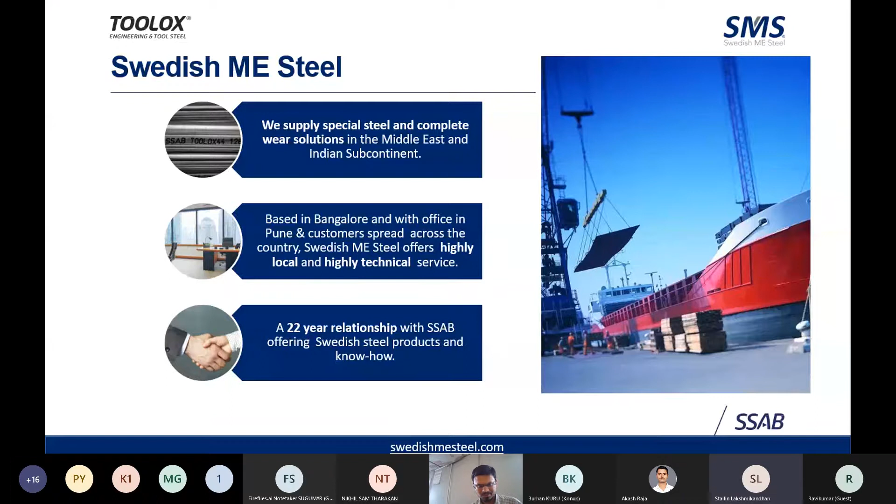So what is Toolox? Toolox is a multi-purpose, ready-to-use engineering steel. You might have heard about a lot of pre-hardened materials, but this takes the cake in its manufacturing capabilities, how it uses modern manufacturing technologies, and the combination of both the chemical and mechanical properties which the metal can achieve. It is produced based on a high strength and low alloy concept.

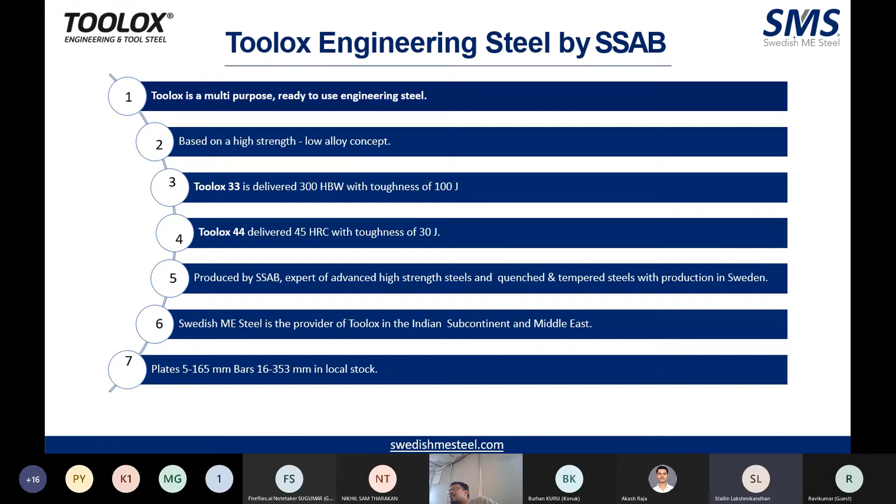It comes in 2 different forms, Toolox 33 and 44, with 30 HRC and 45 HRC respectively. And it is produced by SSAB, who are known for producing advanced high strength steels and quenched and tempered steels, with the production happening in Sweden. So this is the mill in which Toolox is produced, in a place called Oxelösund in Sweden. The mill is capable of producing more than 8 million tons of special steels annually.

So you might have seen a test certificate with other tool steel manufacturers. What differentiates us from others is you not only have the hardness value and the chemical composition, you have the plate material ID, so that if something goes wrong, you can trace it back to where it's been processed. You have the hardness, the chemical composition, and it also comes with ultrasonic testing of each and every single plate, as well as the toughness, and the yield and tensile strength values.

So you have the chemical composition and all the mechanical properties given, and they are all guaranteed properties. That is what differentiates Toolox from other tool steels. We use a blast furnace in the steel making, not the arc furnace of older years, and the quality is maintained throughout the production techniques.

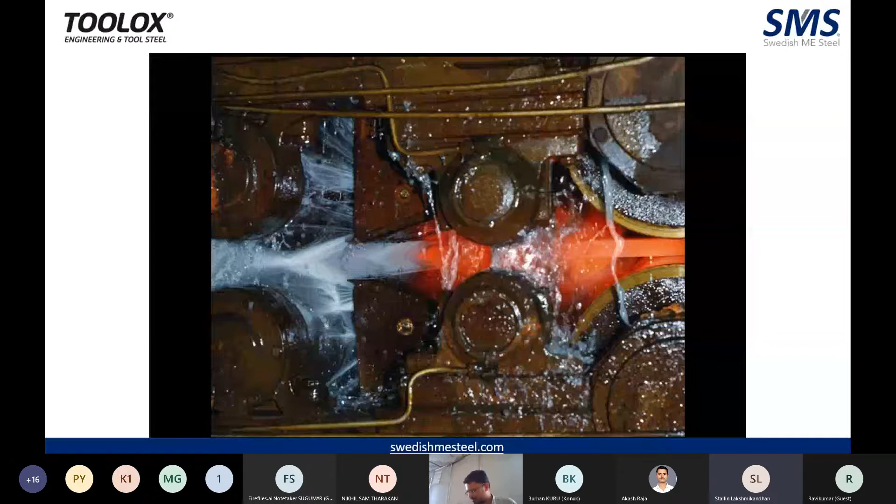So if you sum it up, this is exactly where the entire R&D of the material happens. As you can see, the metal is in hot rolled condition. It's water quenched, and it changes to room temperature within a matter of seconds. Extreme water quenching happens at extreme force, and for the different thicknesses of the material being produced, the amount of water at different temperatures defines the matrix of the material. And that's where we get this combination of high hardness and high toughness.

Since we had already said that this has a unique combination of high hardness, high toughness, and high tensile strength, it can be a multi-purpose steel, and it can be used in your plastic molds, your cold forming, your hot applications, as well as various engineering components. So for us today, the main focus lies in cold forming.

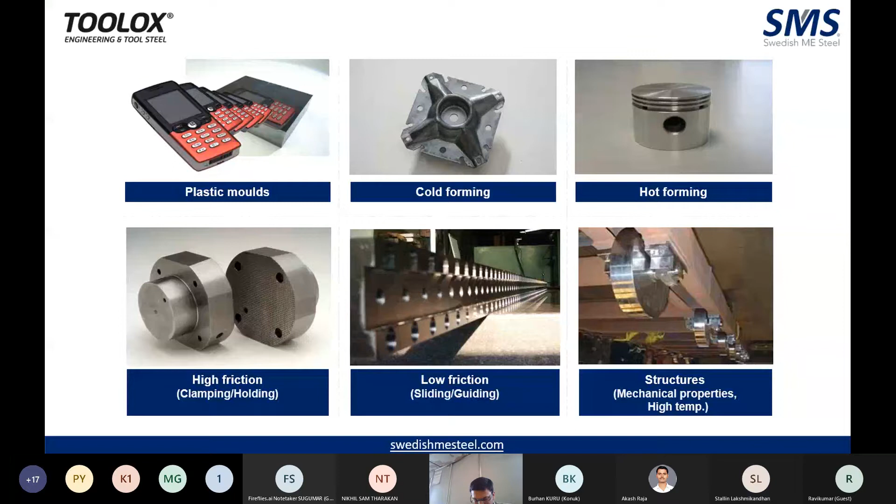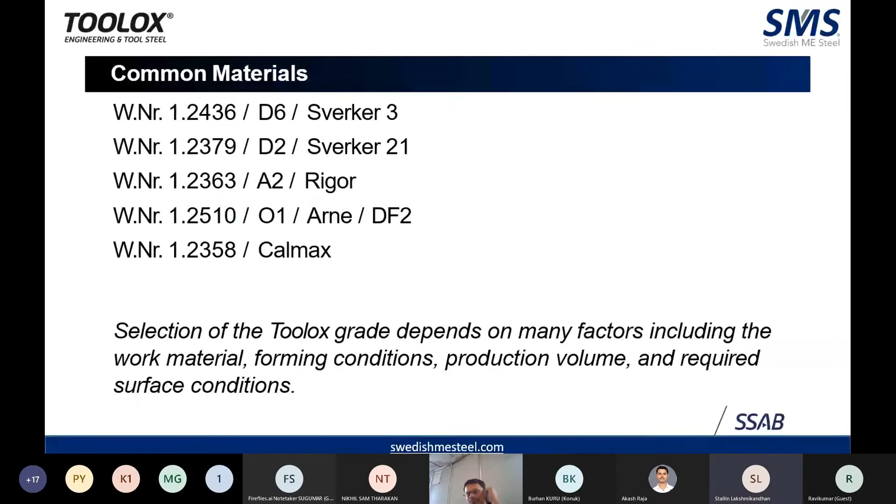So Toolox in cold forming. So these will be the common materials that you would have used: D2, D6, A2, O1, Calmax, or various kinds of material which are commonly used. And if you choose the application wisely, then all these materials can be replaced with Toolox.

So selection of Toolox grades depends upon many factors, including the work metal, what is the forming condition, what kind of volumes you expect out of the material, and the surface conditions that you require. So based on that, you can decide whether to go with Toolox at 45 HRC itself, or you need to do any kind of surface treatment to it.

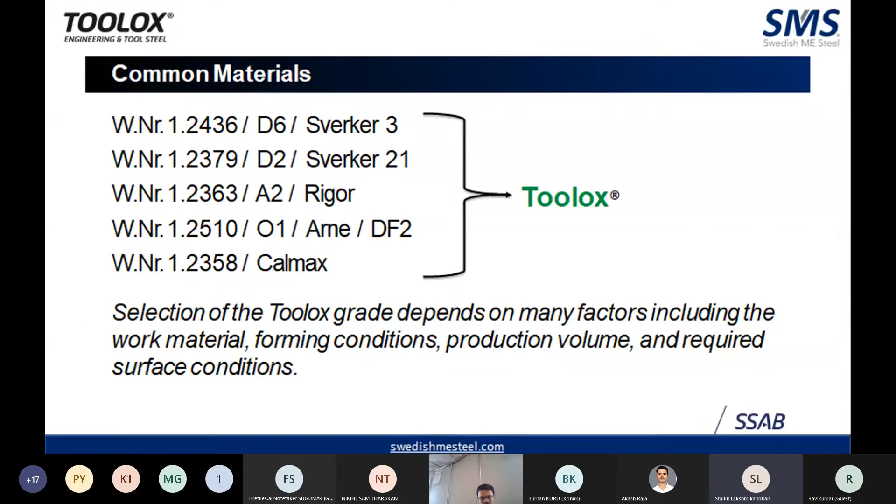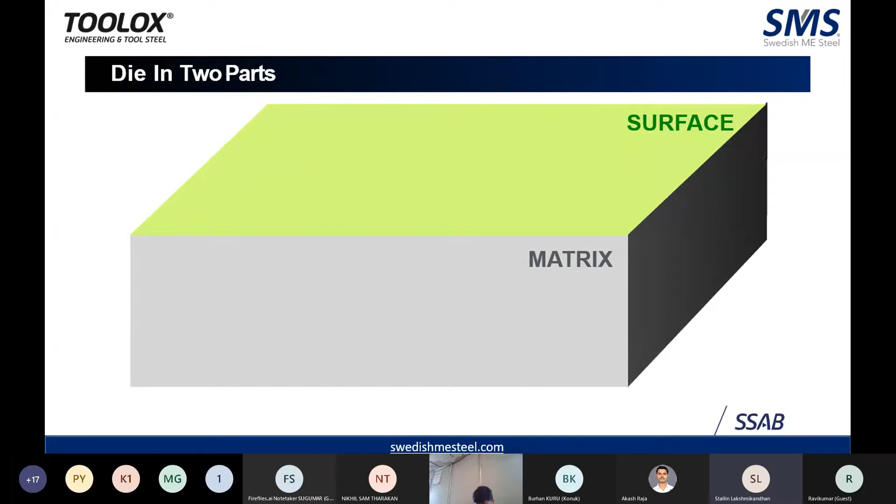So for a die in two parts, let's look at the different points required for a material both at the surface and the matrix level. At the surface level, the material has to resist different types of wear. It has to provide high surface quality and finish, and it should be suitable for surface engineering. At the matrix level, it should resist chipping and cracking. It should carry forces of various service loads, and it should maintain dimensional and shape stability.

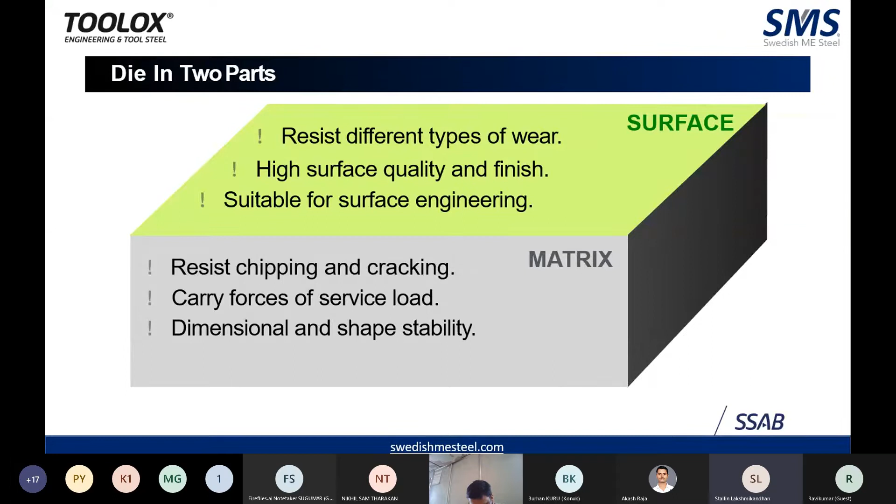So if you consider all these qualities both at the surface and matrix level, Toolox with its unique properties ticks all the right boxes and all the different parameters that you require out of a tool steel.

So when you look at cold forming, there are different failure mechanisms associated with it. One is abrasive wear, caused by hard work material scouring the tool surface. Adhesive wear happens due to friction and adhesion between the sliding surfaces. Chipping is one of the major problems. It is caused by micro cracks, which once initiated propagate through to the surface. And plastic deformation is also a major failure mechanism, and also cracking.

So all these failure mechanisms, particularly cracking, since Toolox comes with a high toughness value, that helps you address wherever you face problems with cracking. Then Toolox can be an effective and efficient material in replacing or addressing those failure mechanisms.

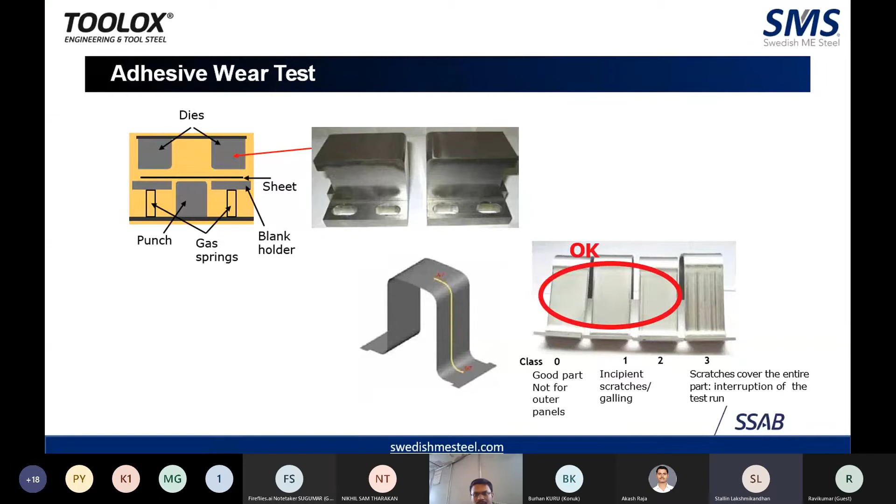So this is the adhesive wear test. So the component with the scratches would interrupt your production run. So 0 and 1 would give you successful results.

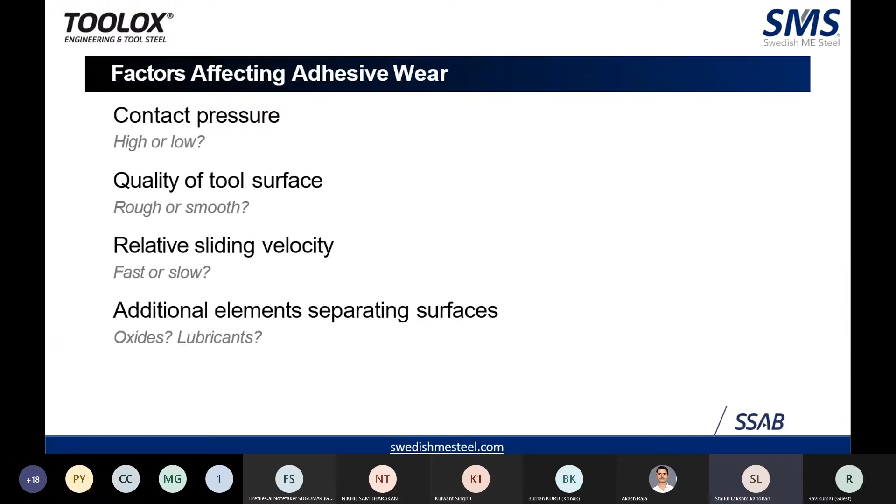So we have seen the failure mechanisms, and we'll just look at the factors which affect adhesive wear: contact pressure, quality of tool surface, sliding velocity, additional elements, separating surfaces. So depending upon how you're using it, for example, you can check whether the contact pressure is high or low, or the quality of the tool surface, whether it's rough or smooth, and then accordingly you can work on it.

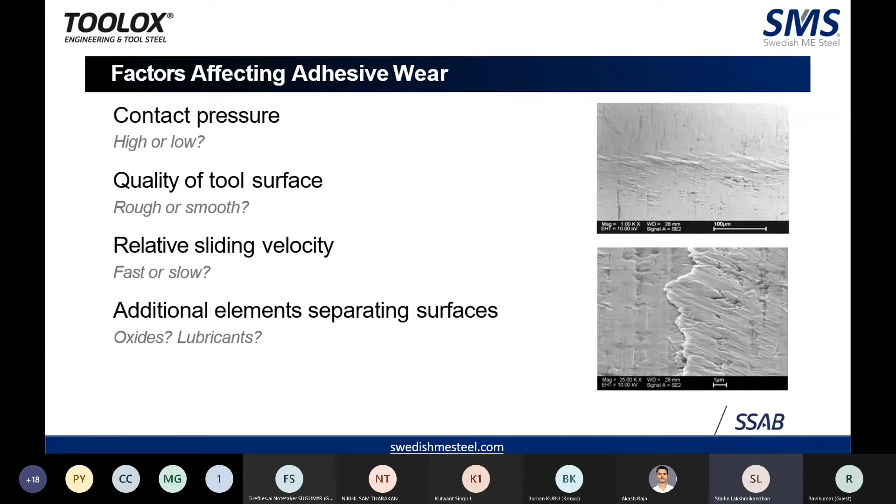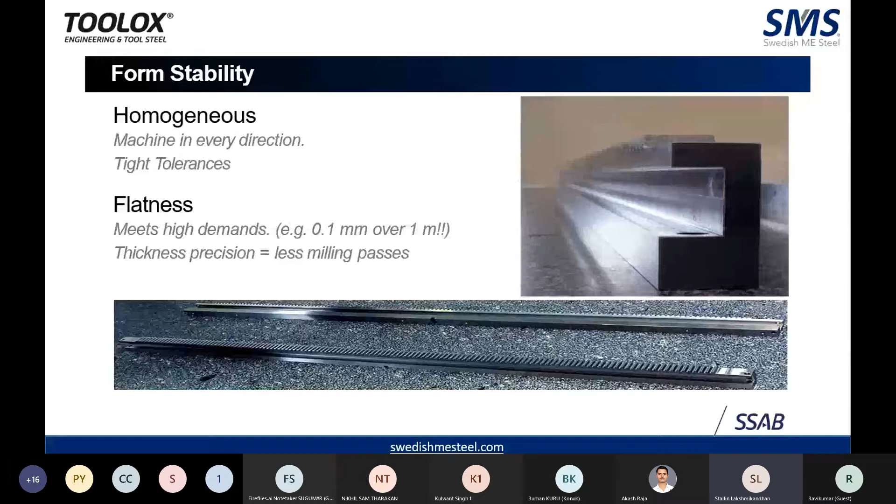But from our experience, the manufacturing time from raw material to the finished part, even without considering the heat treatment time and the cost involved, you'll be able to save at least 25 to 30% of the time, so you'll be able to manufacture Toolox faster compared to the regular materials.

So there will be a lot of questions. Okay, fine, you are saying your material is 45 HRC, but I require 50 HRC, 58 HRC, 60 plus HRC for my applications. What am I to do? Is this material compatible with that? It's very much compatible. Toolox is a very effective and excellent substrate for all kinds of surface engineering that you need to do.

So as you see, there are different kinds of surface treatment methods available. We'll see briefly the parameters required for different surface engineering methods. And this shows Toolox 44 at 45 HRC as the base material, and you'll be able to achieve around 65 HRC with nitriding, more than 70 HRC with PVD, and close to 55 to 56 with induction hardening.

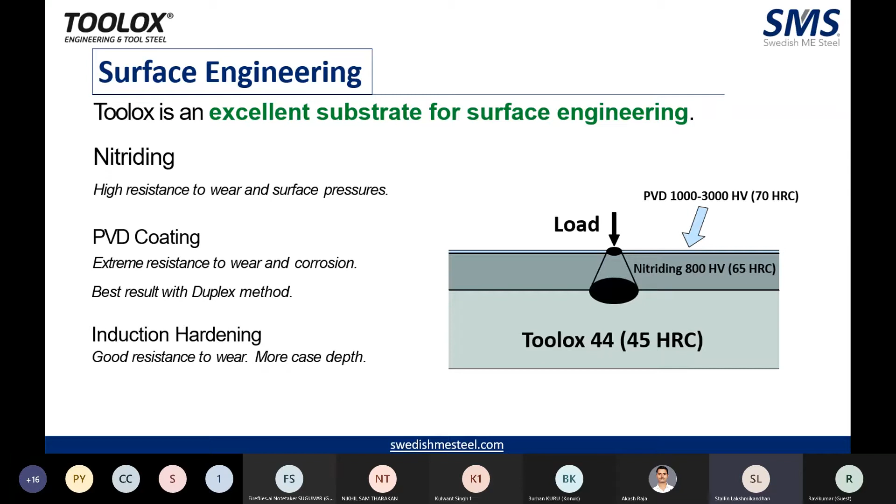So this chart gives you the various values for Toolox 44 and Toolox 33, at what hardness, what soaking time, and up to what hardening depth that you can take it into for this. So depending upon the hardness that you require to achieve, you can use the required process.

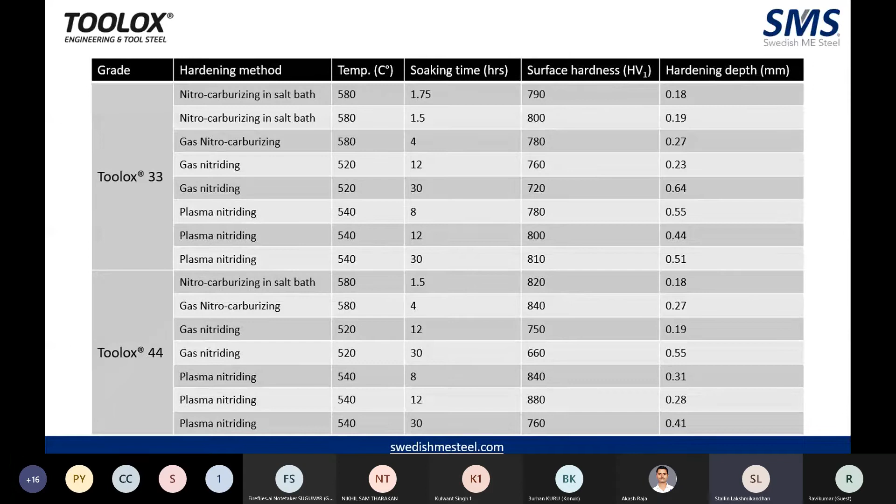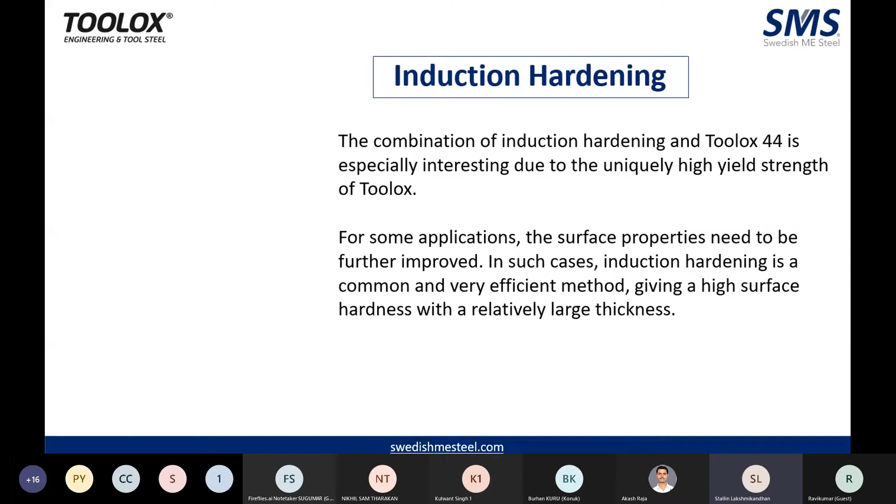So first we'll check out the induction hardening. This is a process in which the case depth can be improved up to 3 to 4 mm. The hardness achieved is around 55 to 57 HRC. The depth of hardness is 2 to 4 mm that you can achieve.

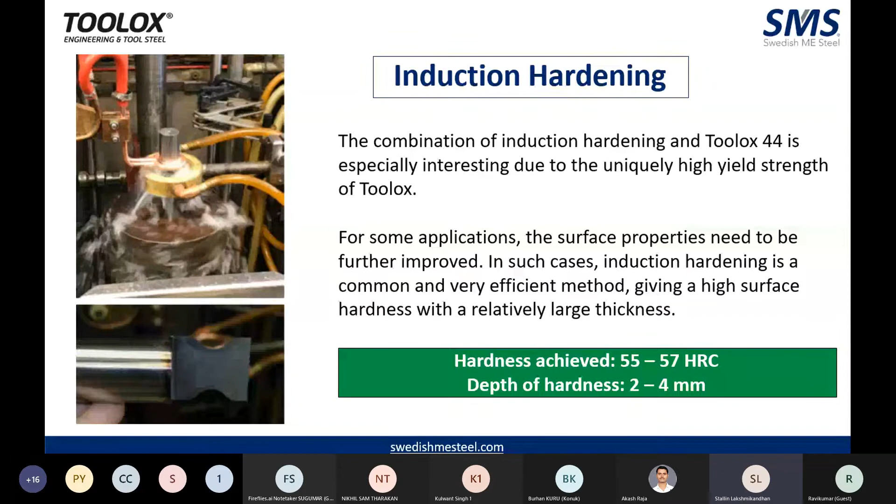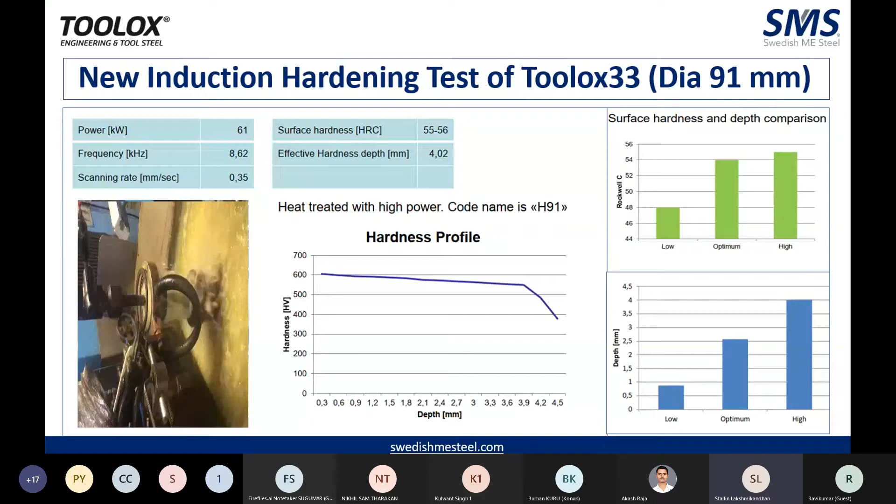So this is the new induction hardening test that we have done for Toolox 33 in 91 dia. You can just see the process, how it's been done. As you see for the different parameters of induction hardening, what you can achieve is, even with Toolox 33, you can achieve 55 to 56 HRC, with an effective hardness depth of 4.02.

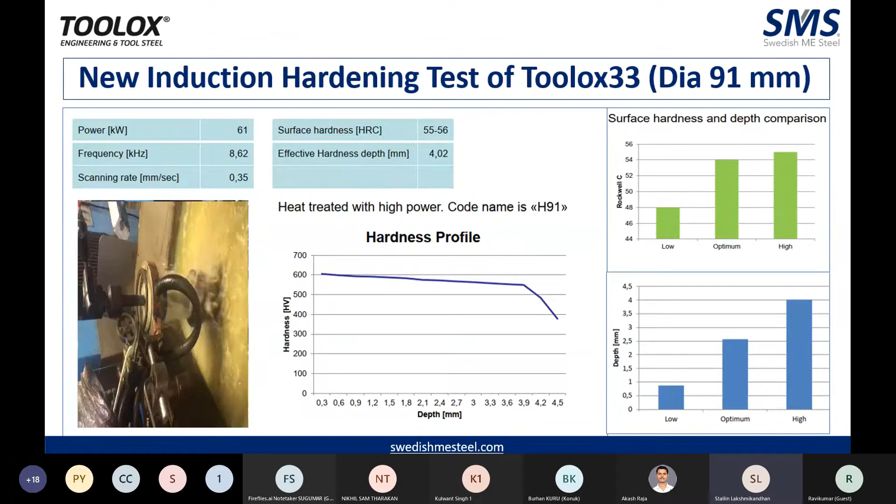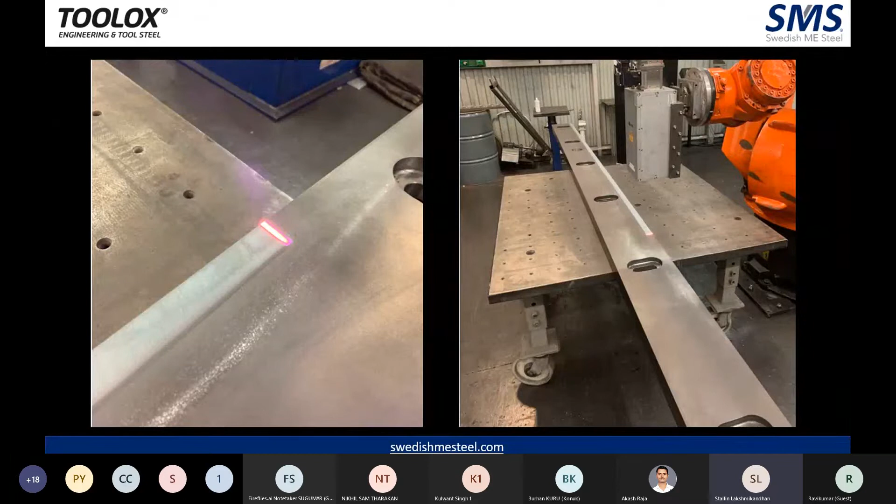So this is also another process, which is an upcoming, innovative and exciting process called laser hardening. This is also a technique wherein you will be able to increase your case depth of 0.2 to 2.

So when it comes to Toolox 44, you can improve up to 800 HV, and Toolox 33 you can go up to 700 HV. The main advantage of having laser hardened Toolox 44 is there is little distortion in the whole component.

And since the laser hardened beam width is very accurate and to the point, your cutting edges can be done with this laser hardened edge, and that will give long lasting results. So we shall see how it is useful in the application part when we go through it.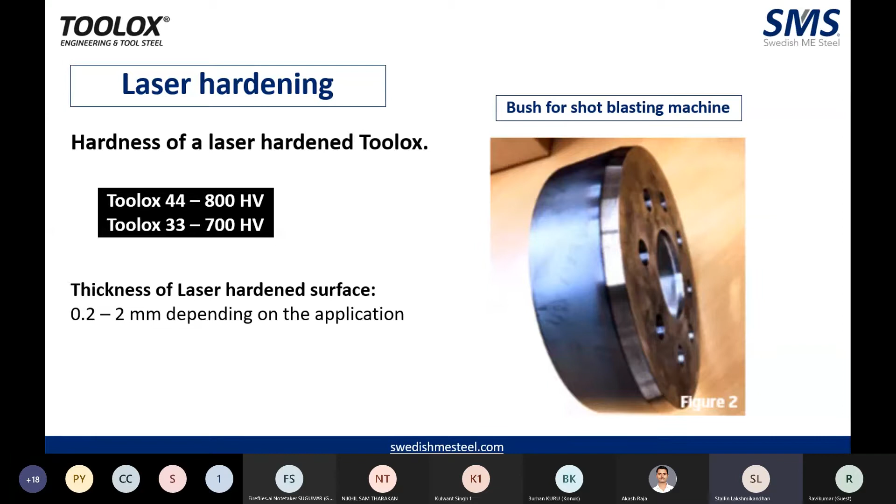So Toolox 44 is delivered at 45 HRC. That's been said. So now comes the question of, okay fine, it's a 45 HRC material - whether I need to spend a lot of money and time for machining and bring in new tools. So we are trying to release those kind of apprehensions. Yes, you require proper tooling, recommended toolings for this.

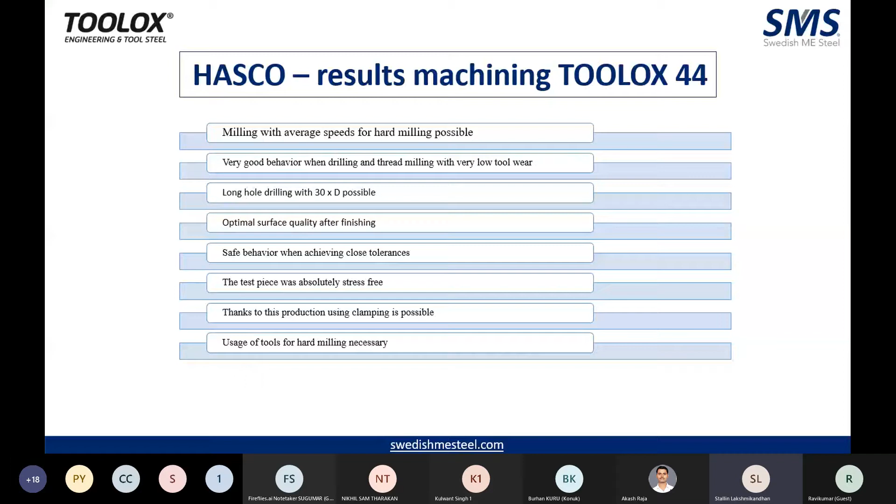There is a famous mold maker from Europe, HASCO. So they have done machining with Toolox 44, and this is their feedback. If used with proper tooling, machining Toolox is not a big task.

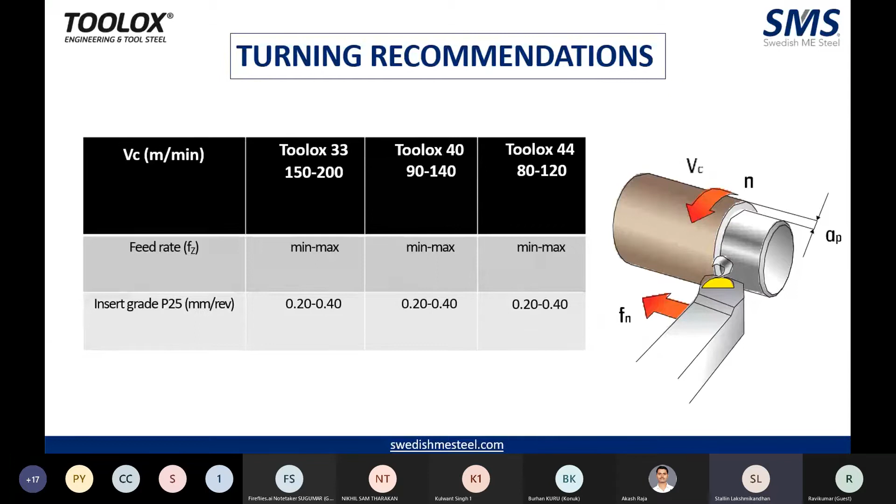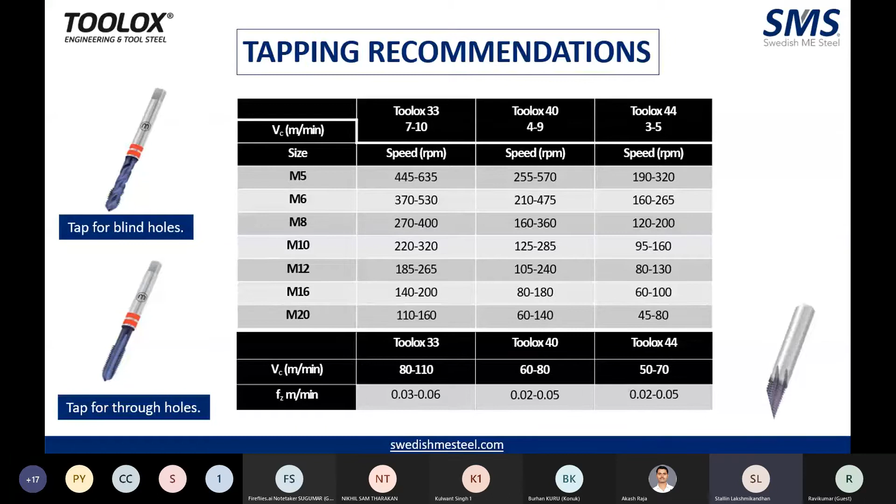This is the turning recommendation. And this will be our tapping recommendation. This is for drilling. So it is not necessarily that you need to take only what are the brands that we have recommended here. You can ask your tool supplier to give any tool equivalent to the nomenclature, whatever has been mentioned. So that will serve your purpose.

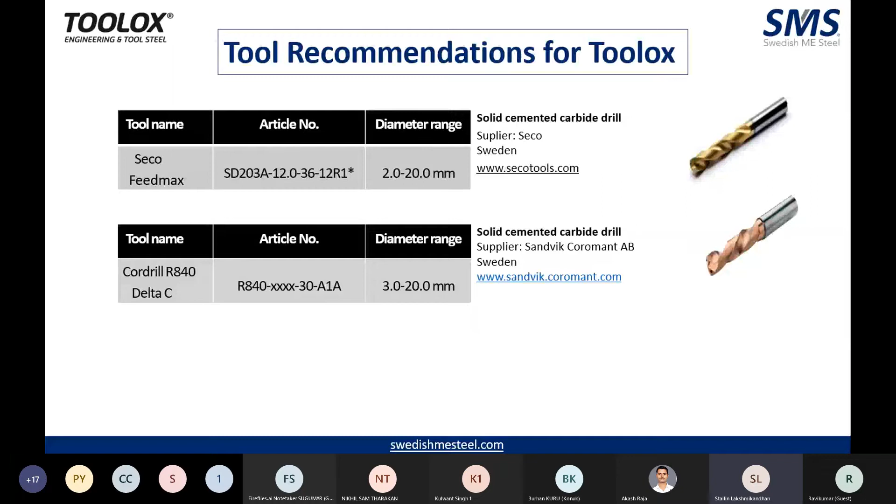So high-speed rough milling, which has been done. As per the example that we have given here, the insert lifetime has run around 180 minutes, and the volume of chip removed is 161 centimeters square per minute. So even though you have removed extensive, close to 30,000 centimeters square of chips, the deformation is very, very minimal. It is able to maintain less than 0.1 mm on flatness, even though you have done extensive machining with this.

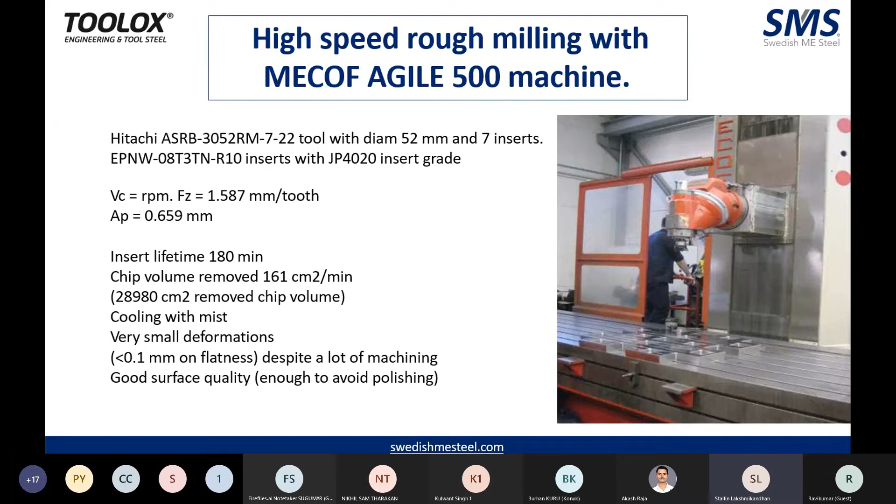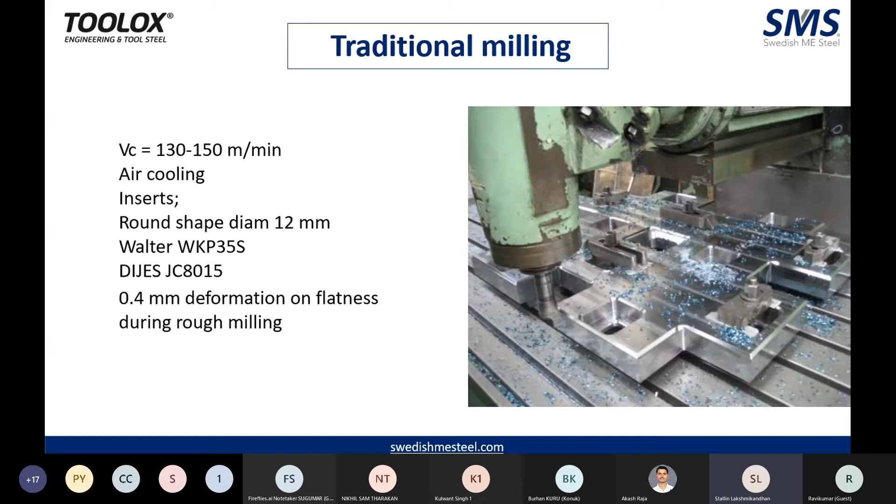So not only can you have extensive machining like the previous one, even traditional milling you can do with Toolox. So even with traditional milling, the deformation is around 0.4 mm on flatness during rough milling. This has been done in a normal tool room in Pune. As you can see, milling is not restricted to any particular machine.

So let's look at the different applications Toolox is used for. Before getting into the applications, we'd like to remind everyone of the quality of the material that we are in here. So this graph gives you a clear idea of how Toolox is comparable to other steels.

So Toolox is almost, if not much less, I mean much cleaner than an ESR remelted steel. It's all rolled material in the flats, and what you get is a clean steel without any inclusions.

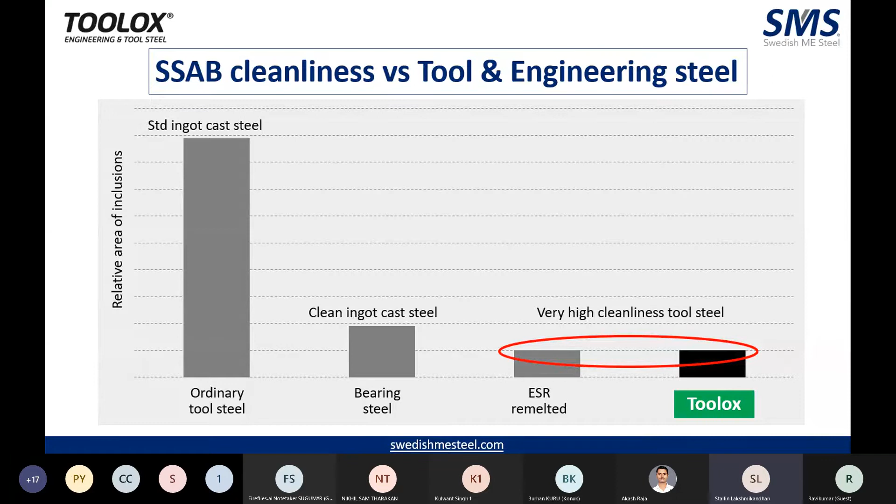So let's look at the comparison between Toolox 44 and D2. You can look at the things, and Toolox being delivered at 45 HRC, you get a guarantee of toughness at 18 joules. So whatever metal being manufactured here, it has been done, provided with guaranteed properties.

And at the end, you will find that the CE values being pronounced as 0.97, and 4.25 for D2, which denotes that the thermal cutting and welding of the material is very good for Toolox, and that's not so the case for D2.

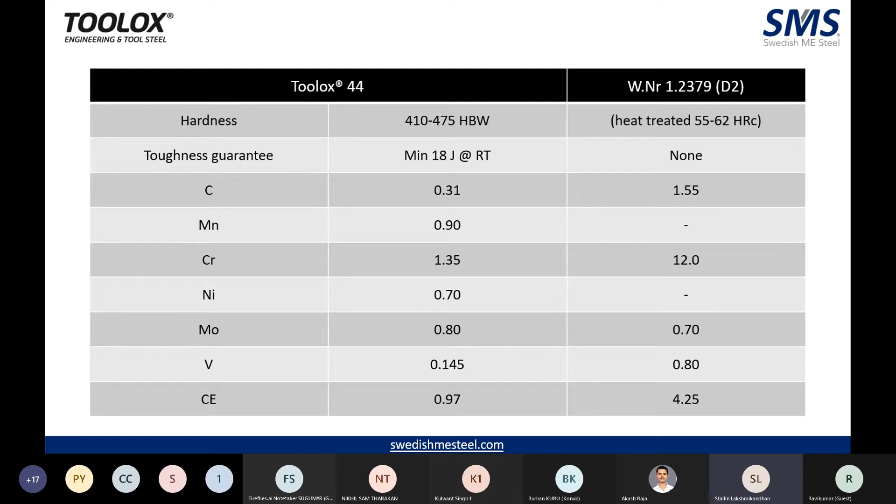Fatigue properties are an important criterion for overcoming chipping and cracking problems in your molds. This graph gives you an idea of what Toolox and Toolox with different surface treatment processes can give you. As you can see, Toolox 44 plus induction hardening gives considerably higher results when compared, even comparable to powder metallurgy steels. So that's the kind of options the material gives you.

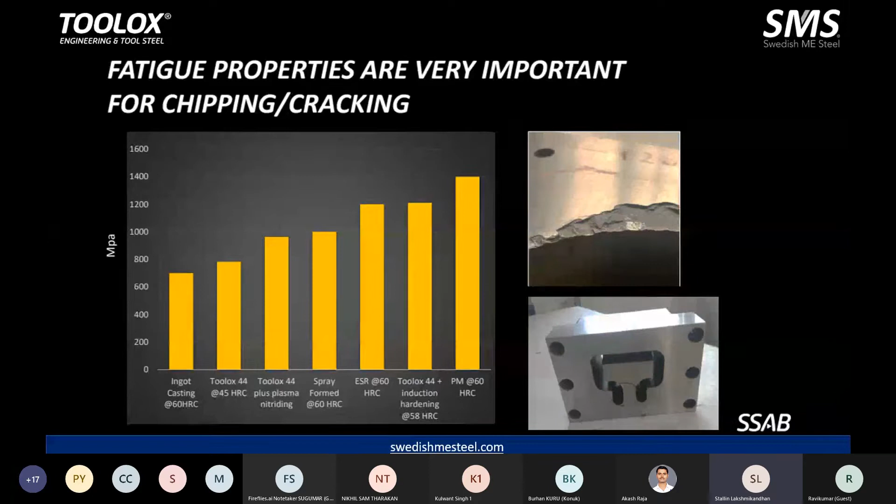This is the price positioning of Toolox used in cold working steel, and as you can see, the toughness of the metal is very high, even when compared not only to conventional steel grades but also to PM steel grades.

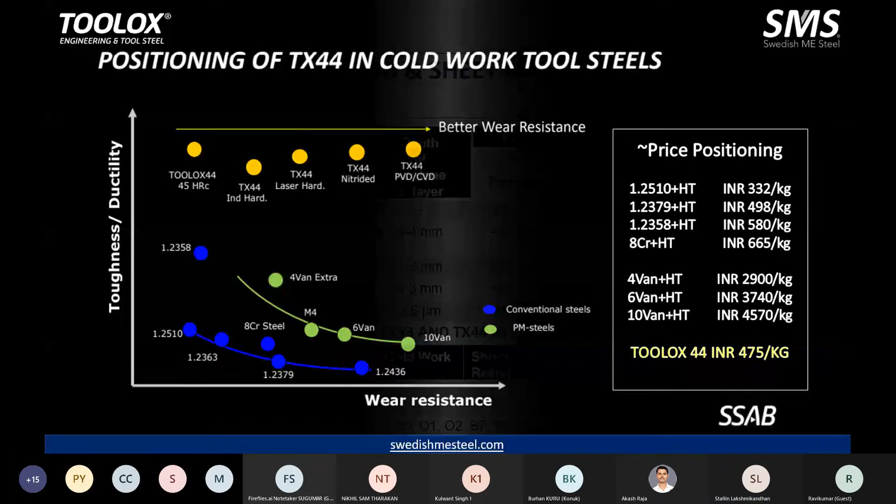In forming, this gives you an idea of different materials you're trying to use for forming your blanking, and with the kind of tensile strength of the base metal sheet you're using, you can decide which process of Toolox to use, whether Toolox can be used directly or Toolox with surface treatment is required. For example, if you're using less than 500 MPa sheet for forming less than 6 mm, then Toolox 44 should be good enough. But if the sheet is more than 550 MPa and less than 3 mm, you need to be sure about Toolox 44 and other processes. Depending upon where exactly your application stands, this will give you an idea of where to use the material.

Replacing tool steels with both Toolox 33 and 44. You can find that Toolox 44 can replace your normal cold working steels like D2 and D3. But adding to that, it can also replace your shock resistant steels like S7 and A2. And if you choose your application wisely, you can also replace some areas of powder metallurgy steels.

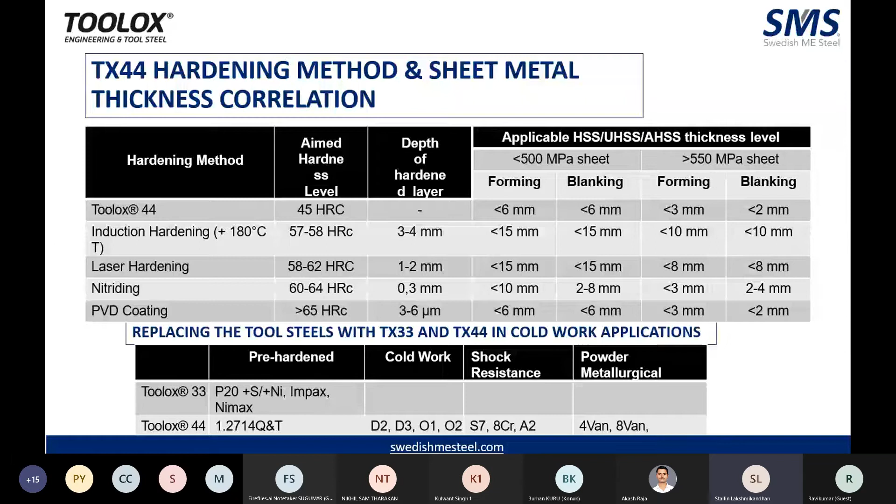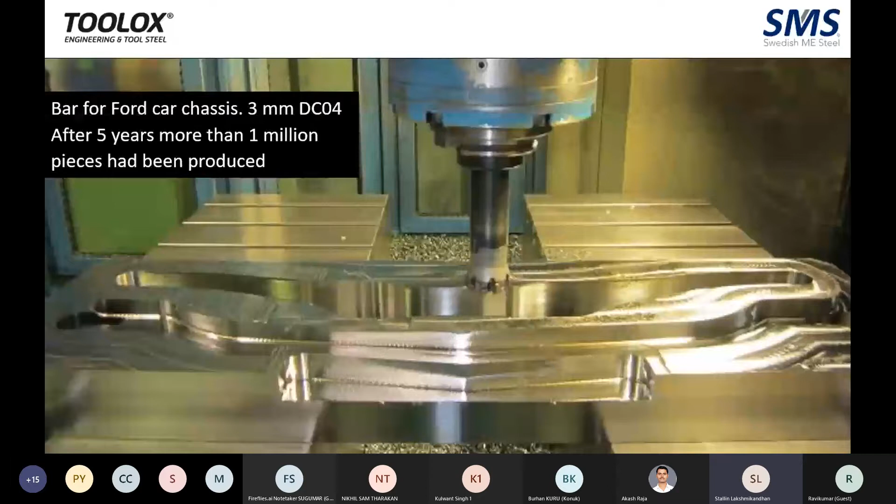This is an application for a Ford chassis. What we have done here is made it a monoblock. Usually with D2 for similar pieces, you would be compartmentalizing into 4 or 5 different parts. With Toolox, you can go with one single piece of the material.

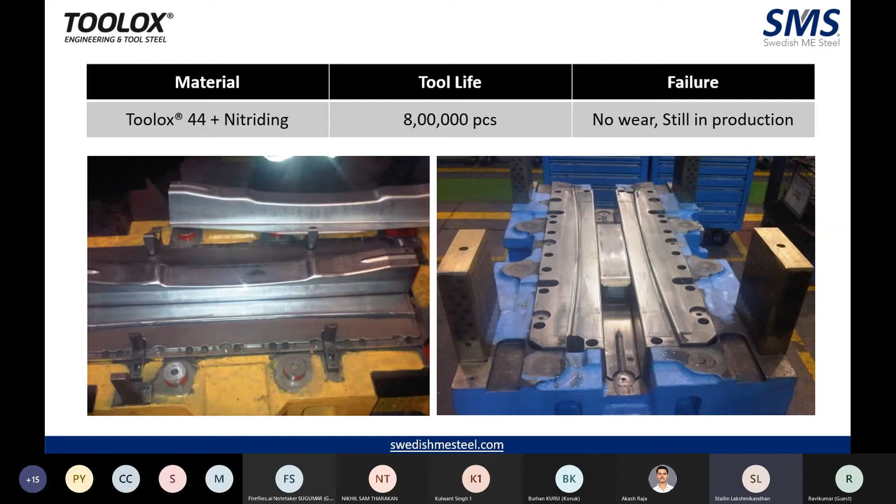This has been used for different grades of Bosch washing machine. Also, Toolox grades have been used here.

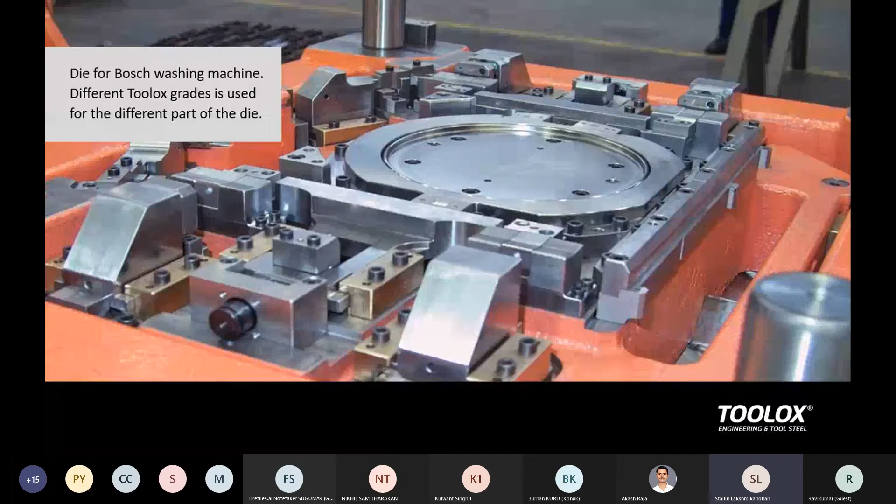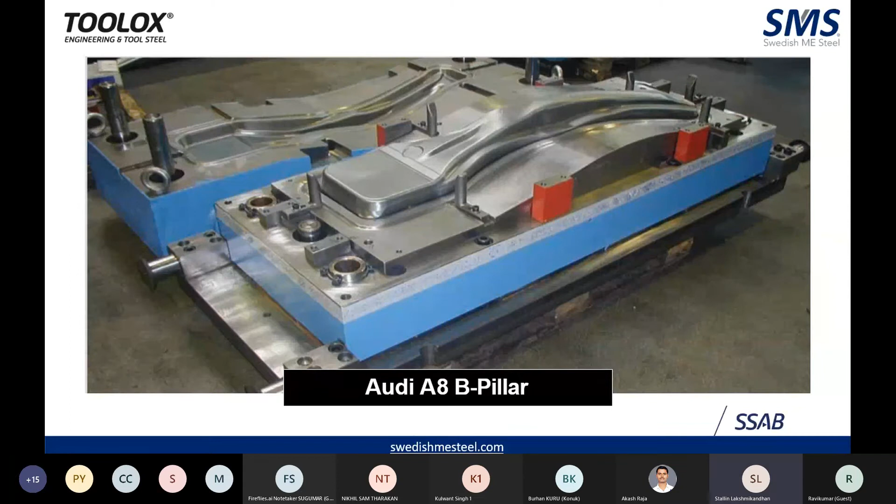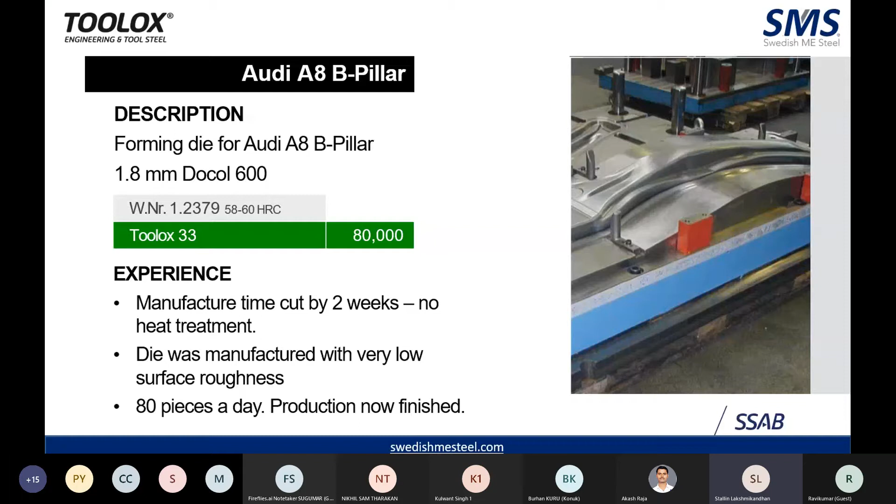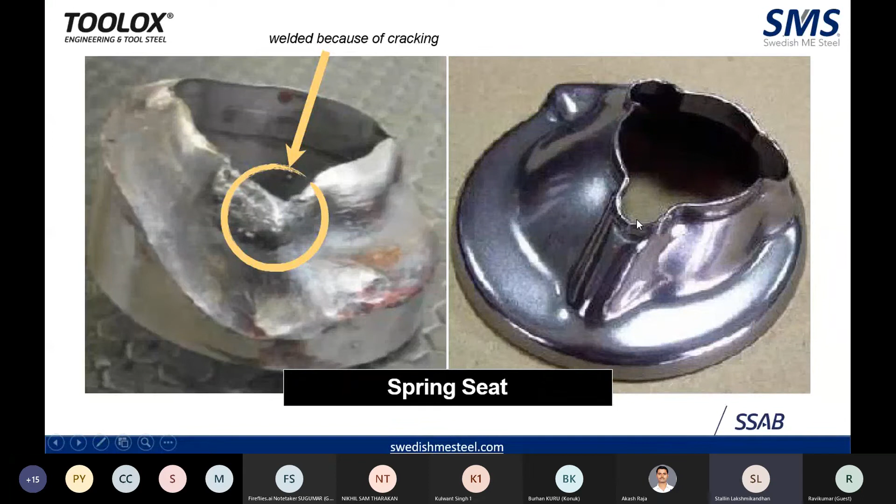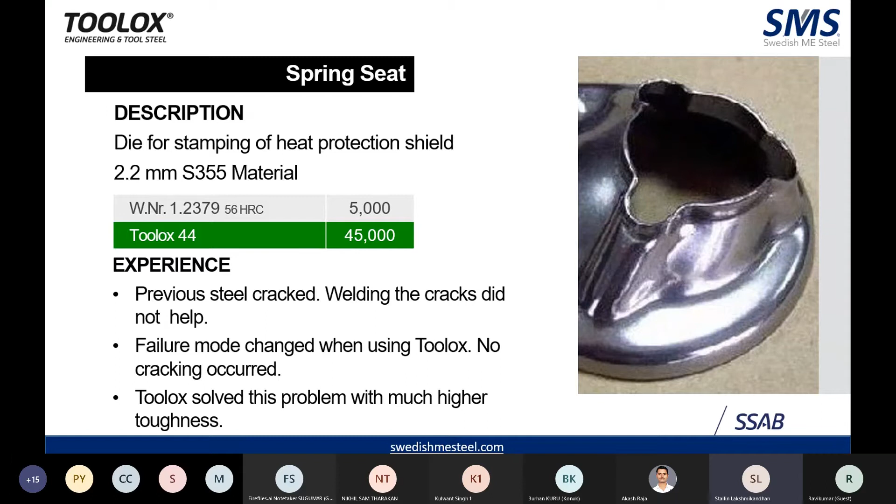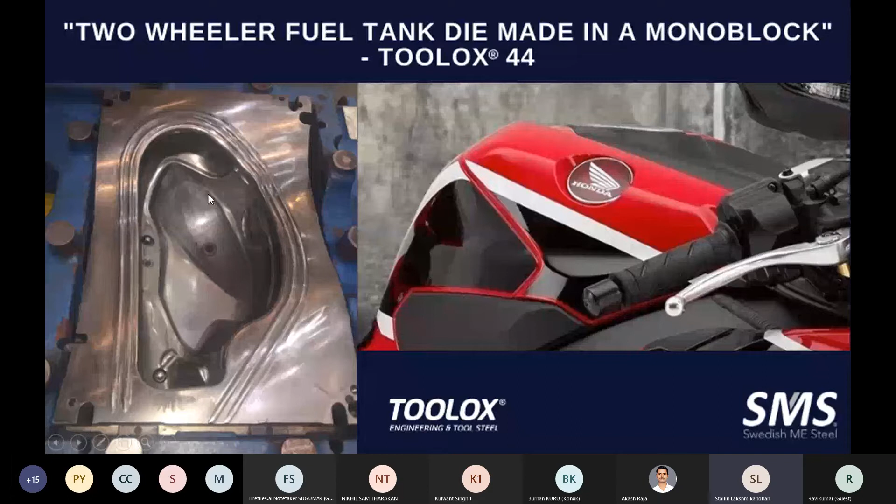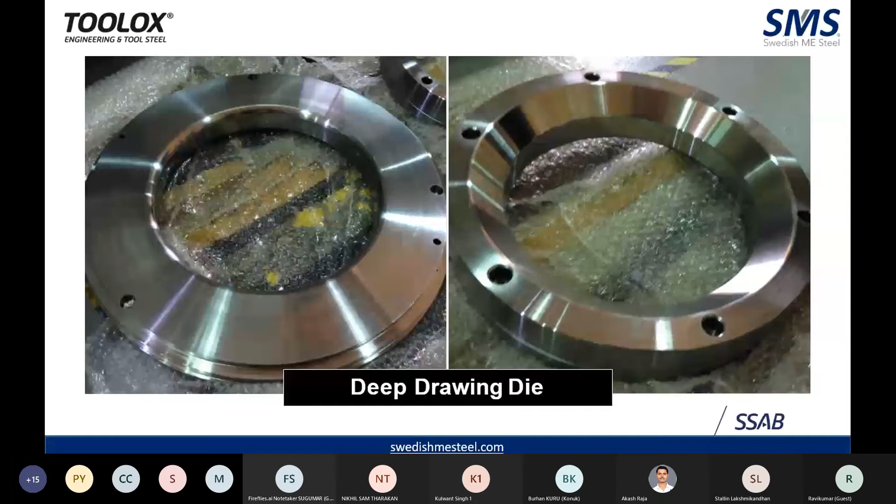Toolox application for deep draw. This is a two-wheeler fuel tank done with Toolox 44, used as a single block. The whole block has been used, and you can find it is almost a hollow block that has been machined. Even after machining so much, you will not find the metal having any distortion or any problem in matching. These kind of components are also used in deep drawing. When compared to D2, Toolox 44 gives good results compared to all other things. Another example of progressive dies.

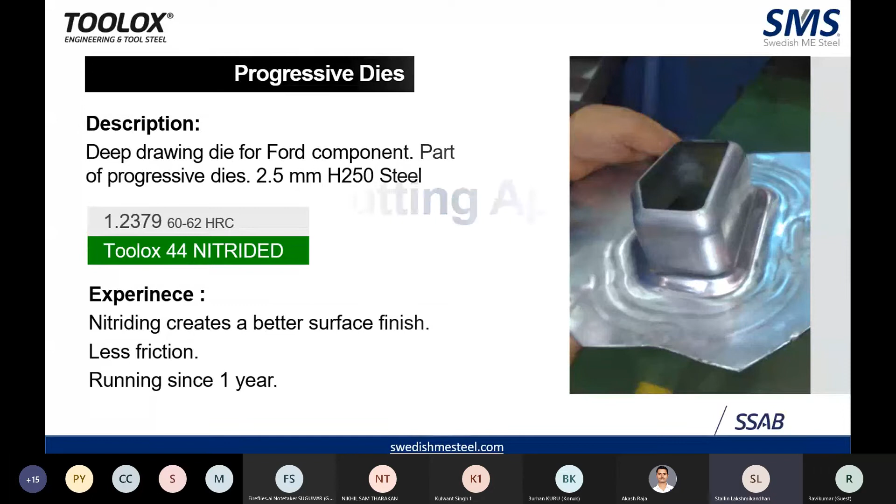In the previous slides, we saw how Toolox is very much useful for easy thermal cutting and welding. This particular video will demonstrate that.

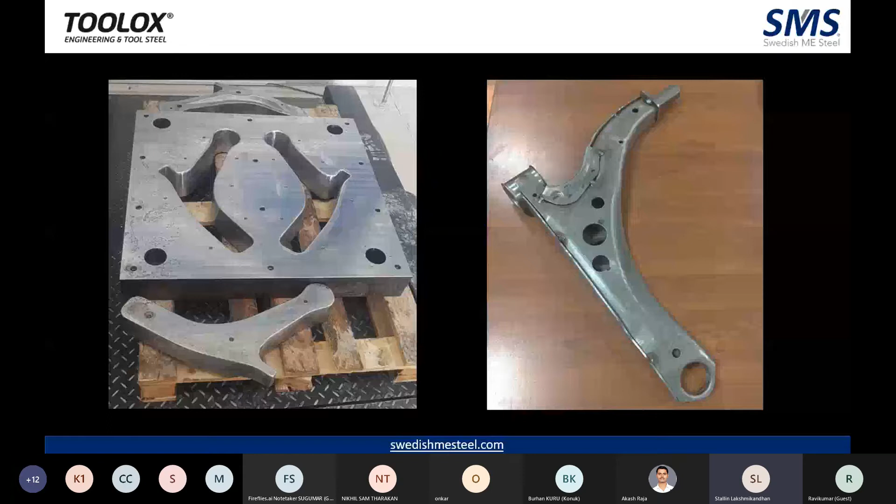For this cutting operation, this is an induction hardened cutting edge. The previous metal being D2, it has failed at 20,000 pieces, with the mode of failure being cracking. When you use Toolox 40 plus induction hardening, the tool life you get is 50,000 components with no cracking failure. At 80,000 pieces you have a problem, but that problem is only wear, not cracking. So anything that has to do with cracking, you can replace the metal with Toolox immediately.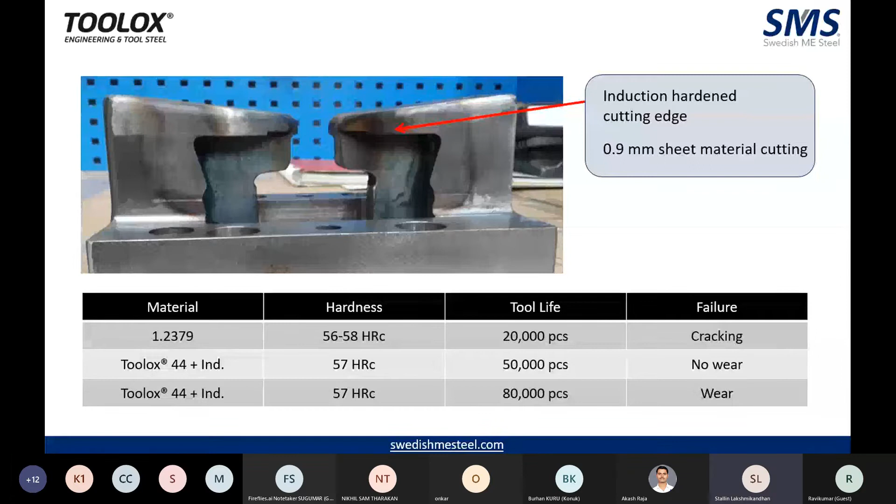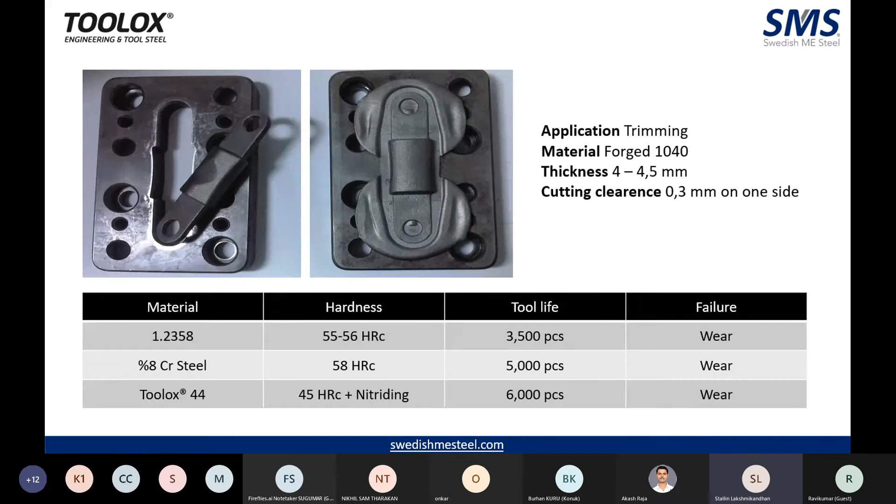This is another application where you can use it. You can find this 2358 material, the tool life is 3,500, and with Toolox 44 it goes up to even 6,000. This is an interesting application what we have here: Toolox 44 with laser hardened edges has given more than 1 lakh shots without any regrinding.

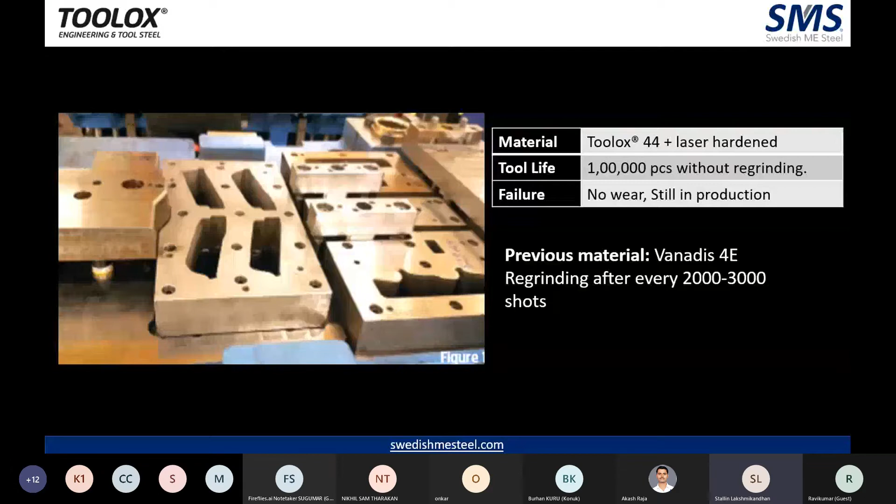The previous material used was an expensive Vanadis 4E, which requires regrinding after every 2,000 or 3,000 shots. You can imagine the kind of saving this can do for you. These are the various laser hardened parts for the same item.

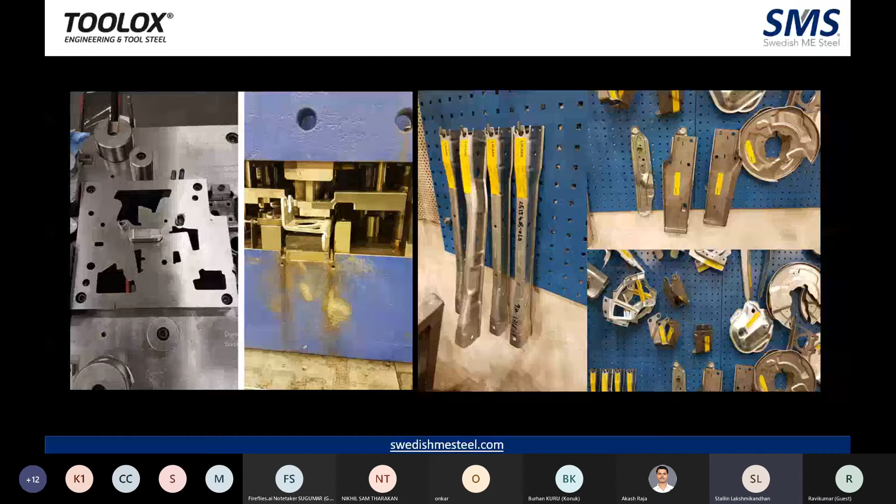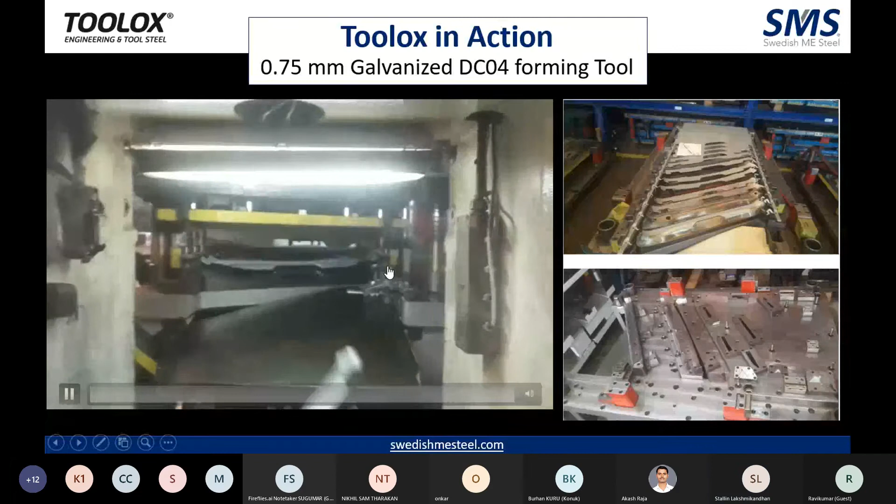Toolox in progressive dies. Let's look at some. So this is 0.75 mm galvanized.

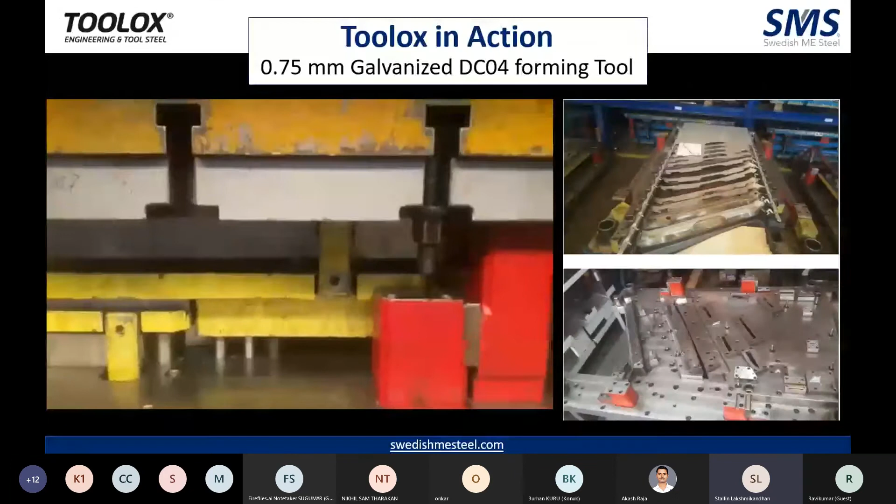So we have come to the end of the webinar here. We have looked at the quality of the manufacturing process, how it's been done. Since it's a material which doesn't require any heat treatment, it saves a lot of money and time, and it can be called a pre-hardened version of cold working steel. We have covered a complete spectrum of applications including drawing, forming, cutting, and bending, and shared case studies from across the globe.